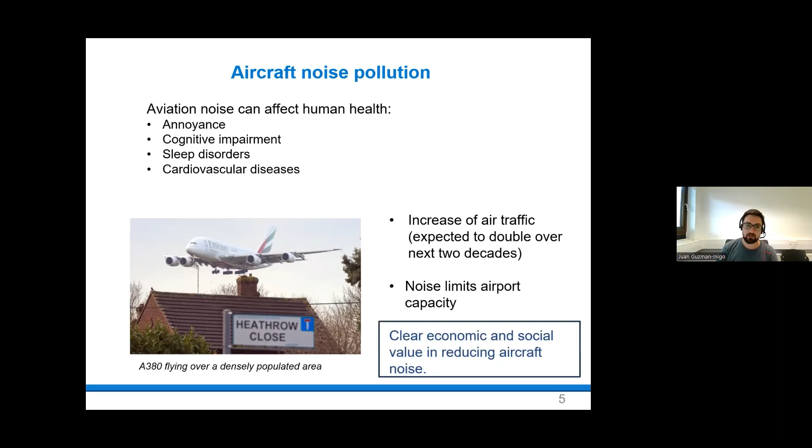So there is a clear economic and social value in reducing aircraft noise. If we could have quieter aircraft, the airport could operate more. And also cities are growing around airports, which means that more population is exposed to this harmful effect.

Okay, so first thing to mention is that one of the main sources of noise in aircraft is the aeroengine noise. And the first thing that I will do, for the ones of you who don't have an aeronautical background, is explain very roughly the parts of an aeroengine and how it works. In this case, we have a turbofan engine. The difference with a turbofan is that there is a fan that is used for the propulsion. The important parts that I will describe are the following.

So we have a fan. The goal or the objective of this fan is to move air at low velocity. And we know that if we are moving air in that direction, because of the third law of Newton, we are going to create a reaction. We are going to create thrust in the opposite direction. So moving air in that direction creates thrust. Then we have the compressor over here. What happens in the compressor is that we take air and we just increase the pressure.

And then we deliver that air with an increased pressure to the combustion chamber, which is here. It's very small, actually. And in the combustion chamber, we mix fuel with the air, and we create a flame. We burn that. What we are actually doing is transforming chemical energy into kinetic energy. Then that kinetic energy is going to be extracted by this turbine, and it's going to be transformed into work. That work is going to be used to move the compressor, and it's also going to be used to move the fan. So that's how the aero engine works.

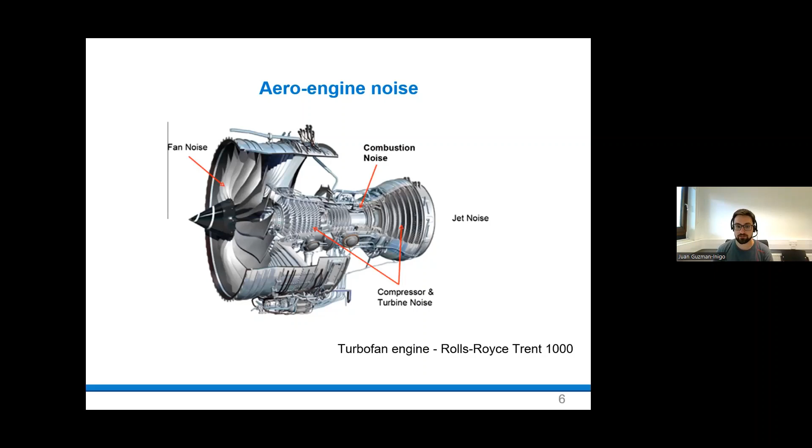What is happening? I mentioned before that the trend in industry is going towards larger fans. We call that bypass ratio. And the trend is going towards ultra high bypass ratio architectures. And what is the impact of that on noise? We see that the jet noise will decrease, because the velocity of the jet is going to be reduced, and the noise scales with that velocity. But on the other hand, fan noise is going to increase, obviously, since we have a larger fan, and combustion noise is going to increase.

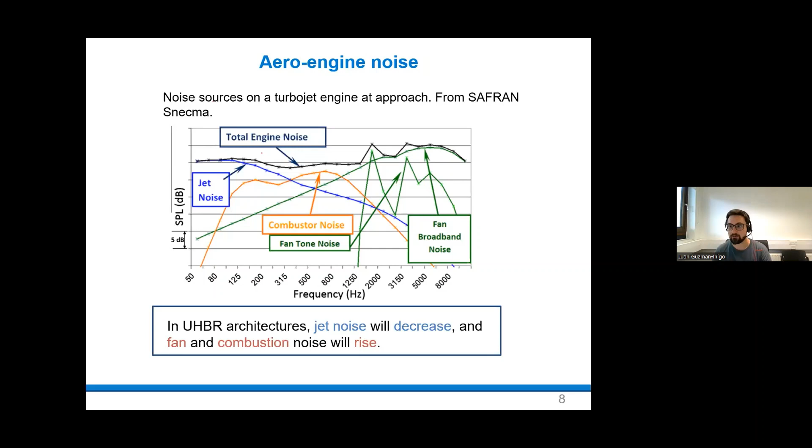But I will explain in a minute the current trends in aviation and how that is going to affect combustion noise. Okay, so at the moment we are in a very exciting moment, and there are two main current trends in commercial aviation: a push for sustainable aviation and a renaissance of supersonic and hypersonic aviation.

So what is happening in terms of sustainability? In the last 10 years, we have reduced pollution. We have more efficient aero engines, and obviously they pollute less. But the driver of that change was efficiency. We wanted aero engines which were more efficient. Now, however, this is changing. Now the driving objective is net zero. We are in a climate emergency, and we are trying to design aircraft that, if possible, have zero emissions, or reduce the emissions as much as possible. What's happening on that front?

So obviously we have electrical aircraft. We change the traditional aero engines, we include batteries or fuel cells, and then we have a lot of small propellers. I'm not going to talk a lot about that because there is no combustion there. But there are two other trends containing combustion.

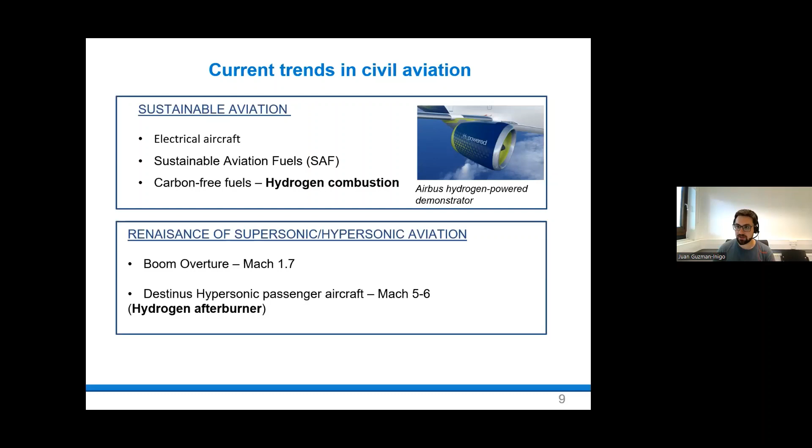So in traditional architectures and traditional fuels, as I mentioned before, combustion noise is becoming important. But when we move to the current trends in civil aviation, when we move to hydrogen combustion, supersonic aviation, combustion noise might be very, very important. Okay, that's about why we should care about combustion noise now. But what is combustion noise?

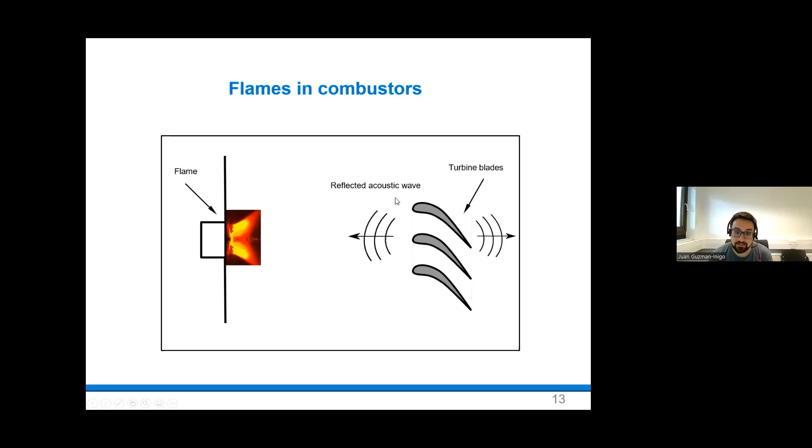And what happens is that, as we mentioned before, unsteady heat release produced by the flame is a source of direct noise. That direct noise propagates inside the combustor, reaches the turbine, and there is a component that is reflected. Another component propagates, and that's the one that is interesting for us, the exhaust noise, because that's going to contribute to the combustion noise that we can perceive outside of the aircraft. But the reflected component is also very important. Why is that? Because, as I said before, flames are very sensitive to acoustics, so they get excited and generate further direct noise. So if we want to model direct noise, it's complicated, not only because modeling flames is hard.

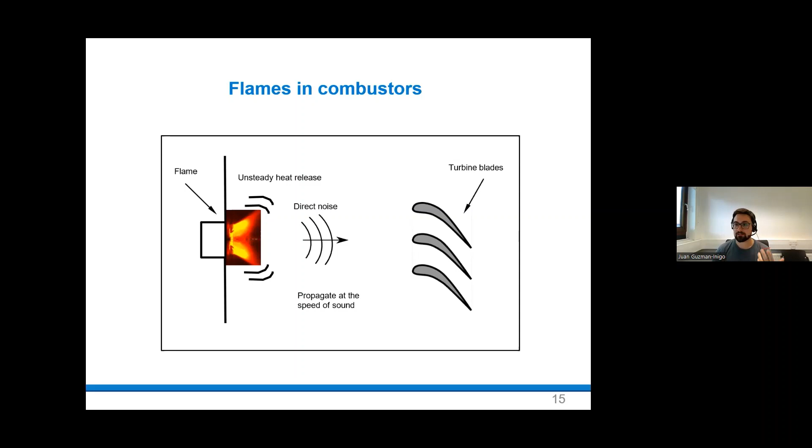I mean, there is chemistry, there is turbulence, but also we need to keep that coupling that happens inside the combustor. The acoustic modes of the combustor are very important, and that feedback is important. In fact, it's so important that for certain design points, this two-way coupling between the acoustic waves and the heat release may create what we call thermoacoustic instability.

Part of the research that we do is to develop new models for thermoacoustics, but here we are talking about a different aspect of that, which is combustion noise. Obviously, thermoacoustic instabilities are not good for the design, but also, if you trigger thermoacoustic instabilities, they could create a lot of noise. So for many different aspects, you want to avoid them. Okay, so that's about direct noise.

What we said is that flames are a source of acoustics. Also, they are very sensitive to acoustic waves, and that coupling needs to be well predicted in order to predict combustion noise. And now I will talk about the second component, which is called indirect combustion noise. So the flame, as I said, is a source of acoustics, but also generates flow inhomogeneities that we call entropy and compositional inhomogeneities.

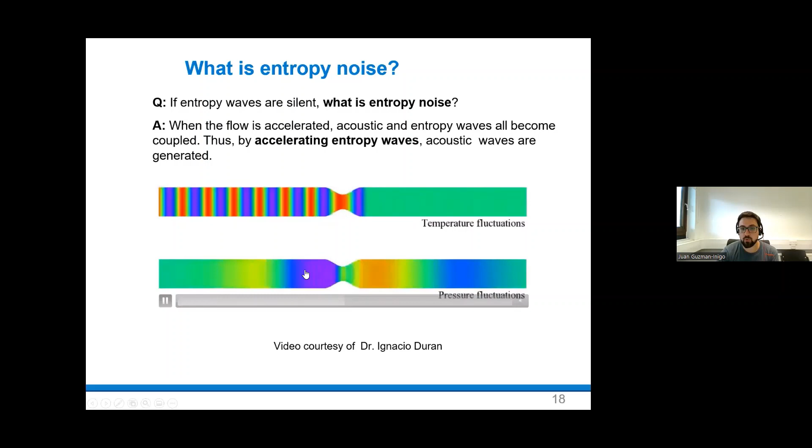Here on top, we have temperature fluctuations or entropy fluctuations, and we see that when they are advected, nothing happens. Here we have the pressure fluctuation, so this is the acoustic field. And the moment that they are accelerated, we generate an acoustic field. We generate this dipole along the nozzle. And this noise is what we call entropy noise. Okay, so that's combustion noise. We have direct noise and indirect noise produced by the unsteadiness of the flame.

But how do we model combustion noise? To model combustion noise or try to understand it is difficult computationally. The reason for that is because combustion noise, or combustion itself, involves a very large range of length and time scales.

So for instance, the flame has tiny length scales because of the turbulence and the flame chemical reactions. They happen in very, very narrow regions. However, the acoustic waves have very, very low frequency, so they have very large wavelengths. So this is expensive from a computational point of view because you have those scales.

Also, if we want to model combustion noise, we will need to simulate the chemistry inside the combustion chamber. Then we'll need to simulate all the blades of the turbine, all the elements of the turbine, the rotors and the stators. And finally, we'll need to propagate that noise to the far field. So that's a very expensive problem if we want to do that numerically with high fidelity simulations.

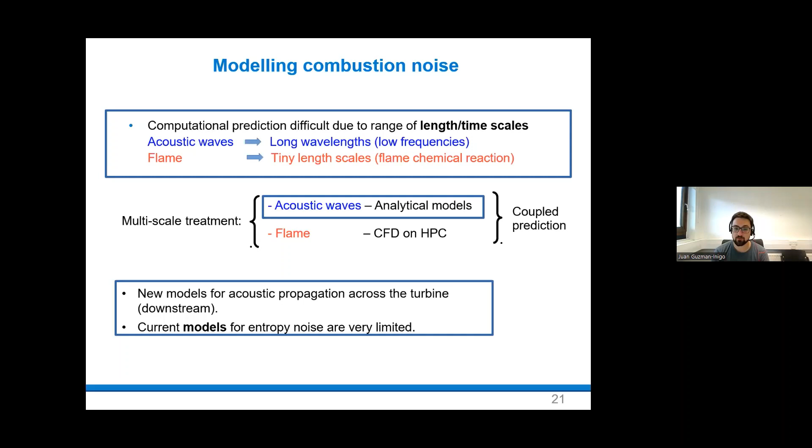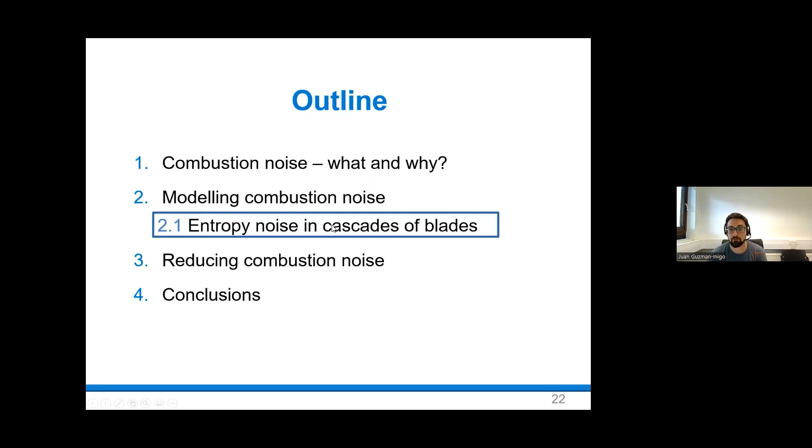So based on that, we did some work. What we're trying to do is to develop entropy noise models for blades. That's the final objective. Right, so I showed you before the concept of entropy noise in a 1D nozzle, which is a slightly simplified idea. In gas turbines, it's slightly more complex because the flow undergoes a rapid acceleration through the combustor and the first turbine stage, and is heavily rotated and accelerated. And there is where entropy noise is going to be created, as I said before, with a component propagating upstream and another component going through the turbine.

New models for this entropy noise are necessary, both for thermoacoustics and for modeling of combustion noise. But the problem is that only zero frequency models are available. This is a very old paper from Cumpsty and Marble. I have to mention that this is actually not true anymore. When I wrote this paper, this was the state of the art, but last year there were a couple of nice publications extending this zero frequency theory.

Okay, but let's see the approach that I used. We were trying to develop these models for entropy noise interacting with blades. And for some reason, we thought that it would be easier to start with just a single blade, develop a model for a single blade, and then move to cascades. At the end, actually, it proved that models for one blade are harder to develop than for a cascade. But well, we managed to obtain a model.

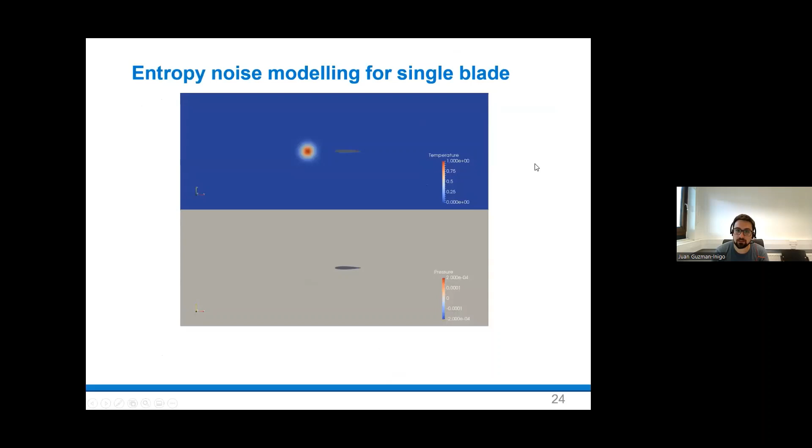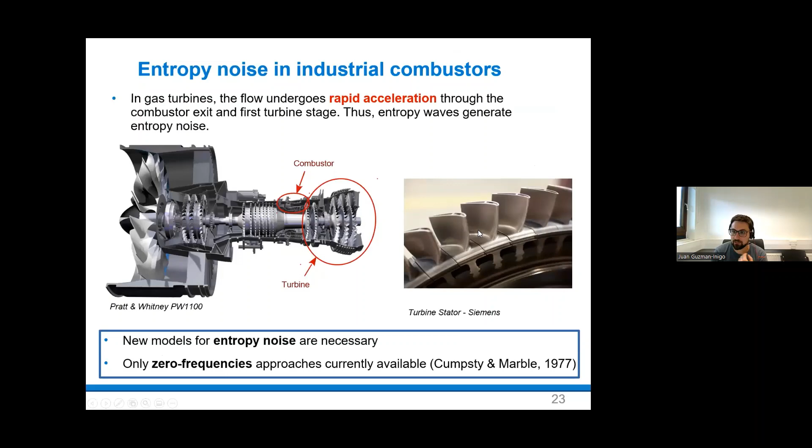So we assume that the problem is 2D with a 2D mean flow. So why do we have that assumption? So if we go back to here, this is the turbine. What we can see is that in the radial direction, the length of the blade is very small compared to the other directions. So the modes in the radial directions are going to be cut off, and we don't need to model them. Okay. Right, so we have a 2D problem. And then we assume that the flow is compressible and inviscid. So those are typical assumptions of acoustics.

And then we assume that this entropy fluctuation is small compared to the mean flow, and also the acoustic field that is generated is going to be small compared to the mean flow. If we do that, we can linearize the problem, and without any further assumption we obtain the linearized compressible Euler equations. But it's difficult to work directly analytically with the linearized compressible Euler equations, especially in 2D. So what we did was to recast those equations using this splitting. This is what is called rapid distortion theory that was introduced by Goldstein.

Just to mention that we extended this theory to account for compositional noise. That's still not published, but we have a proceeding. If any one of you is interested, I will be happy to direct you to that. But the idea of the splitting is the following. So this is the acoustic velocity, and we split it in 3 parts. There is one part that is an acoustic potential. Then we have a part that has to do with entropy. And we have a component that we call homogeneous component. It does not have any physical meaning. And then the pressure field can be retrieved from the acoustic potential field.

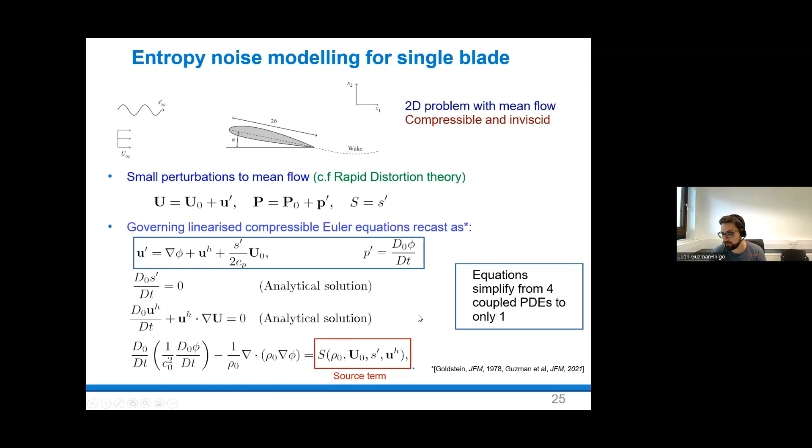Okay, so if we introduce this in the linearized compressible Euler equations, the 4 coupled equations are going to become these 3 equations here. Here we have the entropy equation, which has an analytical solution. We have the equation for the homogeneous part that also has an analytical solution. And finally, here we have a wave equation with a very complex source term. But the advantage of this approach is that we solve this equation, and then we can evaluate the source term and solve the wave equation. So it's a much simpler formulation of the equations if we want to develop numerical methods, analytical methods.

Right, so we want to solve this equation here. And to do that, we make a further assumption. We assume that the blade is compact with respect to the acoustics, but not to the entropy perturbations. The deviations to the mean flow velocity are small in some sense, and we apply what is called the Born approximation in frequency domain and use a Lorentz type transformation. And we can transform this equation into the Helmholtz equation, which is wonderful because there are many analytical tools to deal with the Helmholtz equation. And we decided to use the Green's function approach.

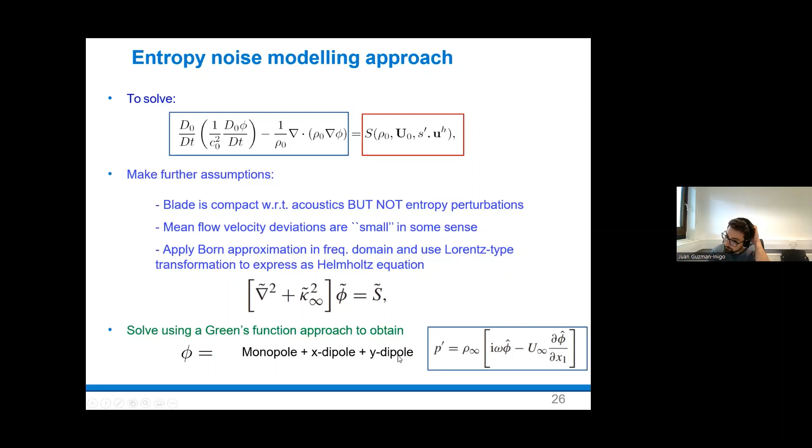And what we obtain is a solution for the acoustic potential given as a superposition of a monopole plus a dipole in the horizontal direction and a dipole in the vertical direction. And then from this potential, we can retrieve the pressure field. So that's actually what we did. We obtained that analytical solution.

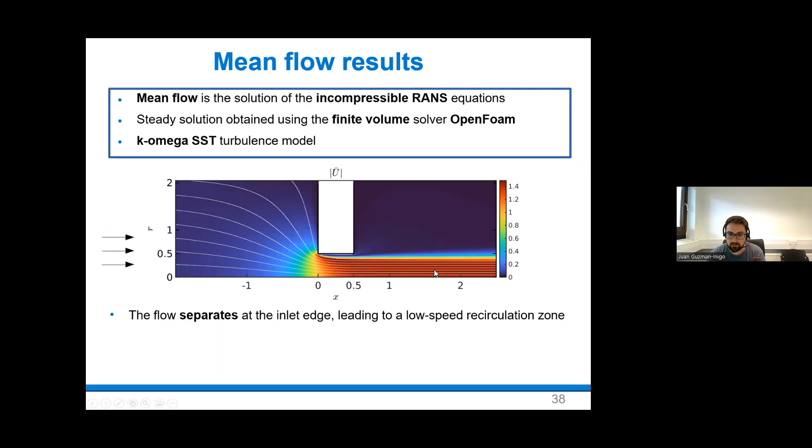Okay, so we solve for that using incompressible RANS simulations, using OpenFOAM with the k-omega SST turbulence model. What we observe here is that the flow comes from left to right. When it reaches these edges, it separates, creating this recirculation zone, and then it remains detached. And here in the center line, there is a high-speed jet, in a sense. Now on top of this mean flow, we can impose acoustic perturbations. We are going to impose an incoming acoustic wave that is time periodic and has a small amplitude so that we can linearize.

And what we want to do is we introduce this incoming acoustic wave, and we want to obtain these outgoing acoustic waves. The acoustic response of this system is obtained as the solution of the linearized compressible Navier-Stokes equations. We have computed that with an in-house solver that is implemented in frequency domain. And as I said before, the objective is we introduce this incoming acoustic wave, and we want to compute the reflection and the transmission coefficient.

Okay, so we validate the approach, and for that we compare with experimental results of Lacombe et al. This is the transmitted wave, and this is the reflected wave. Linear Navier-Stokes, an experiment, and we see a very good agreement. This kind of agreement is good for this kind of applications. And I'm presenting those results in terms of, again, non-dimensional frequencies that I give as a Strouhal number. Okay, so this approach is validated.

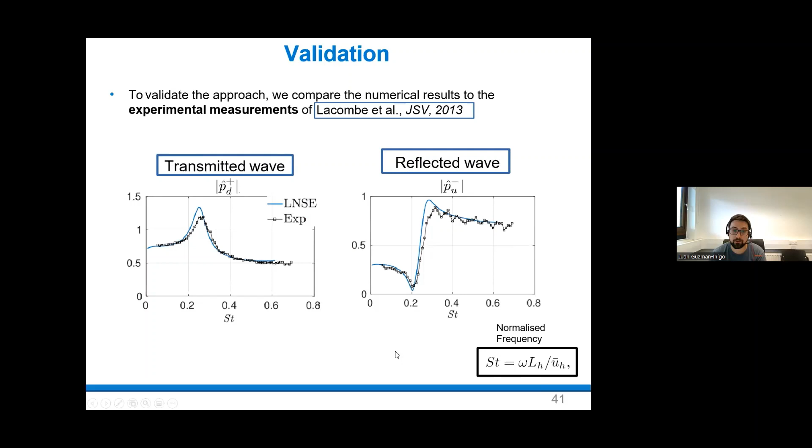Now let's optimize this. To optimize, we are going to use the absorption coefficient. The absorption coefficient basically computes the energy of the incoming waves minus the energy of the outgoing waves divided by the energy given to the system incoming. If it's equal to 1, it means that we have perfect absorption, so we are absorbing all the energy of the system. If it's equal to 0, it means that we are not doing anything, so we are not absorbing any acoustic energy.

And if it's negative, it means that the perforation is going to generate acoustic energy. This is what we call whistling. And it's exactly the same process that happens when you whistle with your lips. In this case, I'm actually creating acoustic energy from vorticity. I'm creating that acoustic energy as a whistle.

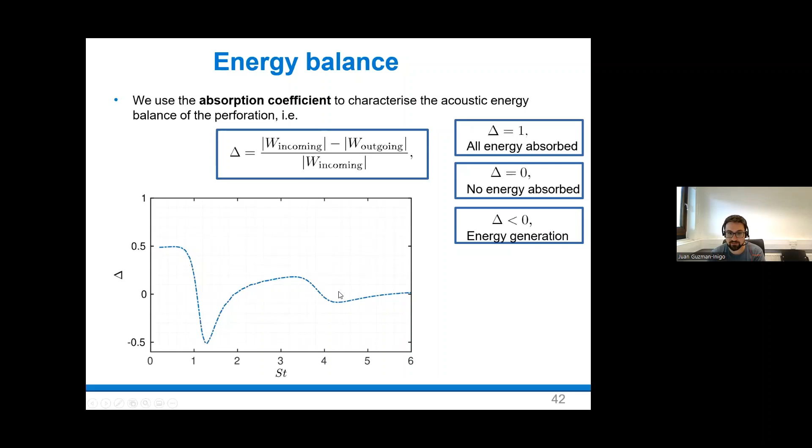So here we have the diagram for that hole. This is the absorption coefficient that we compute. We see that at low frequencies, we can actually damp 50% of the incoming acoustic energy, but then it rapidly drops, and at this Strouhal number, we have whistling. So we have a region of whistling here, a second region of whistling here, and here the absorption is not really good. It's around 20%.

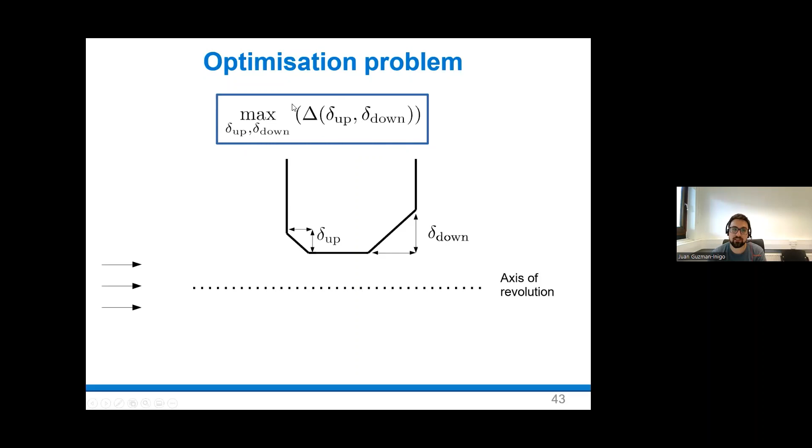Okay, so we want to optimize that, and for that, we are going to use chamfers. We are going to introduce two 45-degree chamfers, one downstream and one upstream, and we want to maximize the absorption coefficient. So basically, we want to find the size of these chamfers, the one upstream and the one downstream, that maximize the absorption coefficient. Okay, so how do we do that?

First of all, we take the absorption coefficient at this frequency, Strouhal 1.3. Why? Because the peak of acoustic energy generation is very, very bad. Actually, it's generating 50% of acoustic energy. Using the absorption coefficient at this frequency, we are going to optimize that using Bayesian optimization. We run the algorithm, and what we obtain is the following configuration. This is the optimal configuration after 300 iterations.

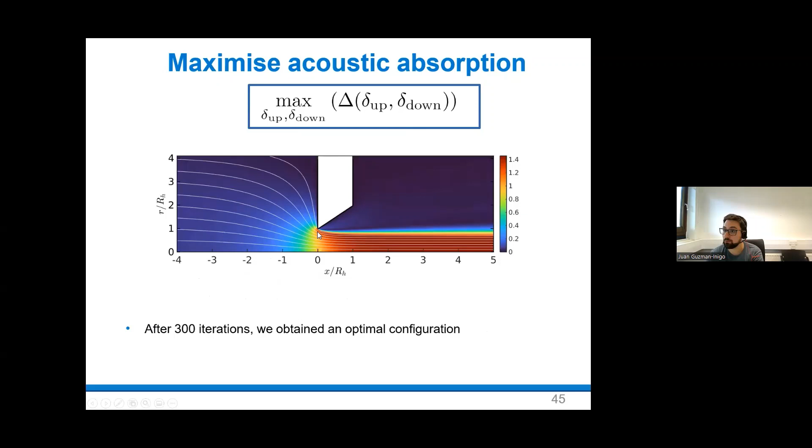And what we can see here is that the chamfer at the upstream is very, very small. So probably this is not converged, because theoretically it should probably be 0. And the chamfer downstream is very large. So in terms of physics, this behaves as a very, very thin hole rather than a hole with a thickness. But what we can see is the absorption coefficient increases from whistling. Instead of creating 50% of acoustic energy, now it's going to extract almost half of that acoustic energy. So this is a huge improvement.

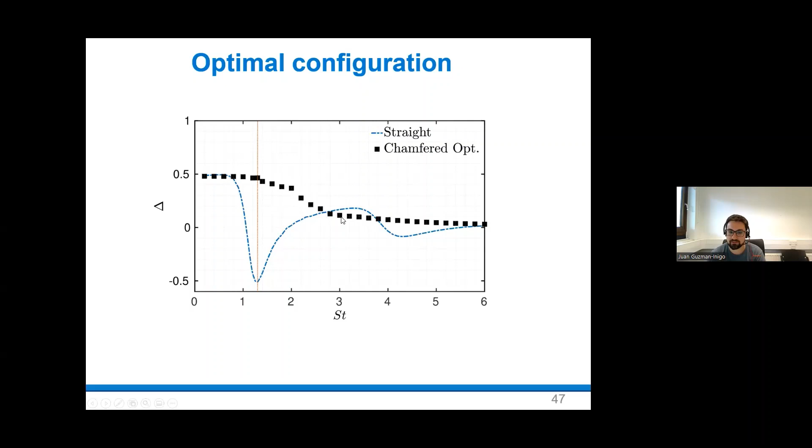And now let's look at that in terms of frequencies. Again, blue is the straight case, no optimization, and the black squares are the optimized chamfer. And we see that we are not just completely removing the whistling. We are actually having a flat region here with 50% of acoustic absorption, and we are improving the absorption in all the frequencies. Okay, so that's in terms of optimizing perforation. This is a technique that could be used to reduce combustion noise. Holes that are already there, we could optimize them.

Let me now finish this presentation with some conclusions. The conclusions are the following. Combustion noise is potentially the next noise barrier for commercial aviation. That is, if we consider traditional architectures and traditional fuels, but also if we consider the new approaches, hydrogen, for instance, or supersonic aviation.

To model combustion noise, we could use a technique that we borrow from thermoacoustic instabilities, that is, multi-scale approaches. But in order to do that, we need to improve the models for the entropy noise or indirect combustion noise, and we need to improve the models for the downstream propagation of sound across the turbine. And what I have presented here is a model for the entropy noise generated by blades.

I have also presented that we can reduce combustion noise if we use optimized acoustic liners. In terms of future work, we would like to extend our work on entropy noise to realistic cascades. So that's actually cascades, not just cascades, but cascades that are thick.

We would like to develop models or a modeling tool that can actually go from flame to the far field. If we change the fuel, we could actually know what happens in the far field to combustion noise mostly.

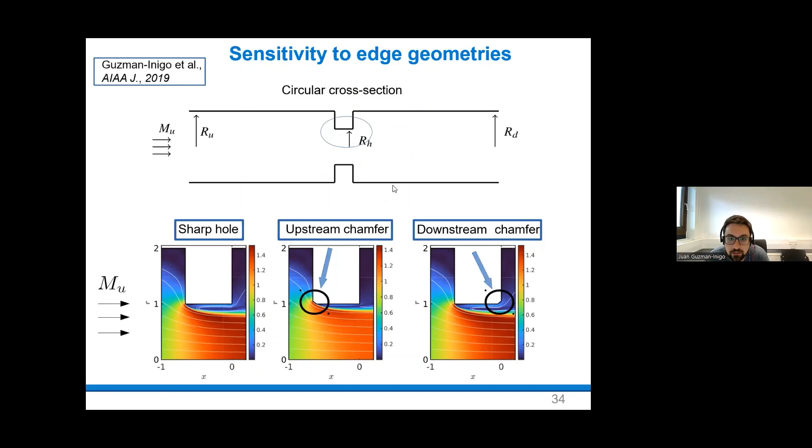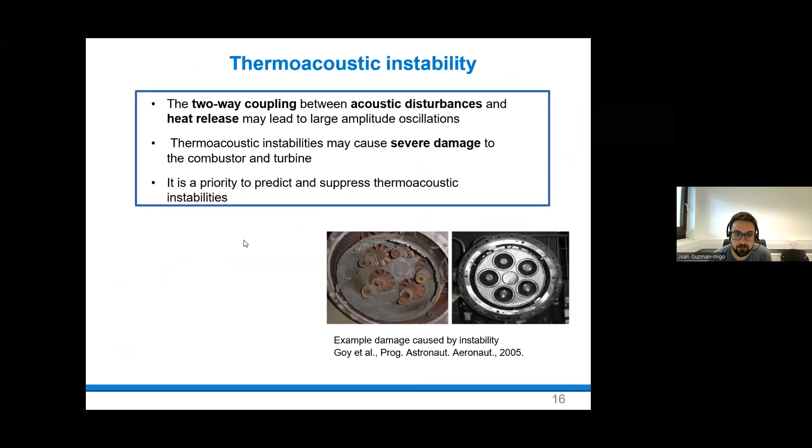Right, so I have another question: how are the acoustic liners incorporated around the combustion area? So let me show you this slide. Let's see. I don't have any good image that I can use. But the idea is that, as I said, the combustion chamber is just a hollow tube, right?

At one of the sides there is the flame, at the other side there is the turbine, and there is a wall around. That wall itself is the wall that is perforated. That's what we can see here in this image. Outside of the wall, you have cold air coming from the compressor. And because that air has a higher pressure, it will go through the perforations. And because that's cold and the gas inside is hot, you create that small layer that protects. So the answer is that the liners are already incorporated in the walls of the combustor.

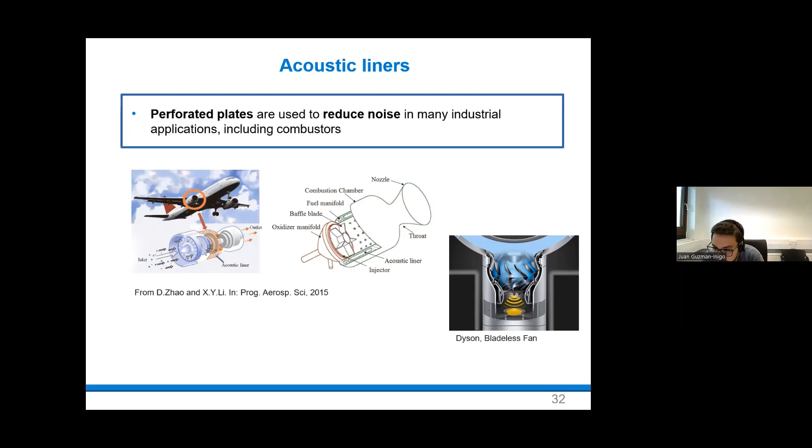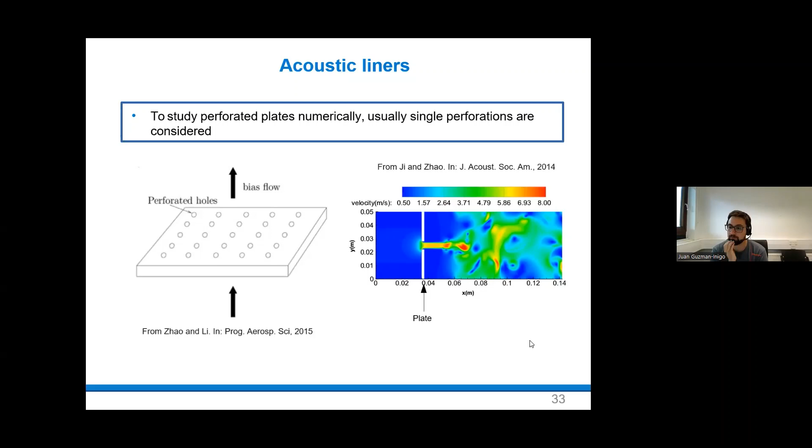So basically we are working with everything normalized, as I said, by gamma pressure, and the entropy is normalized by CP. You divide the entropy fluctuations by CP, that's already a non-dimensional quantity. But the magnitude of those values is not really relevant, I would say. We are not expecting that just a single blade generates that much noise, and also the observer is a bit far. So in order to have a meaningful comparison, we should probably compare in terms of energy.

And also, as I said, we don't expect much entropy noise in this specific example that we use to demonstrate the method. Something to mention is that entropy noise scales with Mach number. So if you go to a Mach number close to 1, we generate much more noise. I don't have the results here, but you can see that in the results.